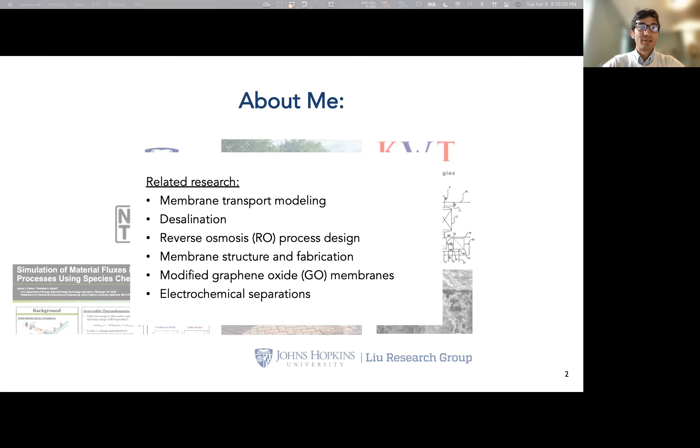From a point of shared knowledge, membranes are pretty much everywhere. Even if you haven't learned about membrane separation as a unit operation before, you're familiar with it. We've all in AP biology or high school biology learned about selectively permeable biological membranes, or done the dialysis membrane experiment, or maybe you make coffee every morning, or in pchem lab used vacuum filtration, or orgo lab. Basically, membranes are thin, selectively permeable barriers used for filtration.

You can think about membranes as mass transfer devices, in the same way that heat exchangers are heat transfer devices.

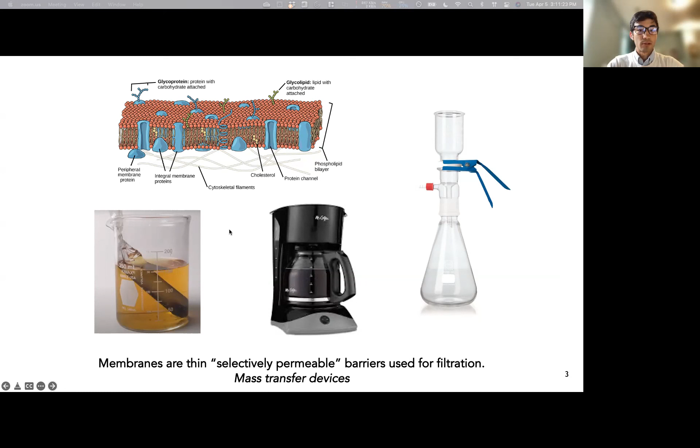Just a little bit of history. I wanted to show that membranes are a very new, young technology. The first really commercializable membranes came around for reverse osmosis desalination for drinking water in the 60s, so it's only half a century old.

Today there's huge market saturation, and there are many large capital projects for membrane desalination, which has been able to fund lots of research for other applications. I'll talk about those today.

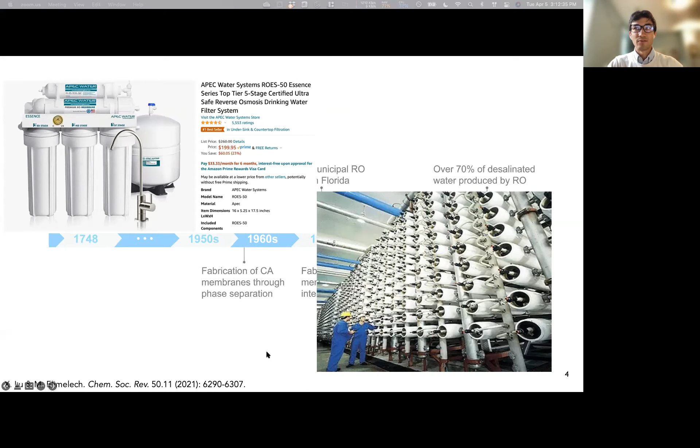Just to show the big scale, I took this off of Amazon, but you can get an RO unit for under your sink. I don't know if you'd want to, but you can. You can also have rows and rows of membrane modules — this is the Ashkelon plant in Israel, and it produces something like 100 million gallons a day of water, with about 15% of their drinking water coming from this single plant. So it really has the entire scale covered.

For some more context, this is the ultrafiltration setup we used in senior lab. So maybe you aren't going to work on membranes in the future, but you might work on them next year, so pay attention. And this is the NETL water lab setup that I was working with data from — a little more complicated maybe, but the same basic principles apply.

Finally, you can scale up — this is the Carlsbad plant in San Diego, California. It produces enough water for 400,000 people. The scale-up process, which I'll talk about a little more, is how we understand the process to build these large capital projects.

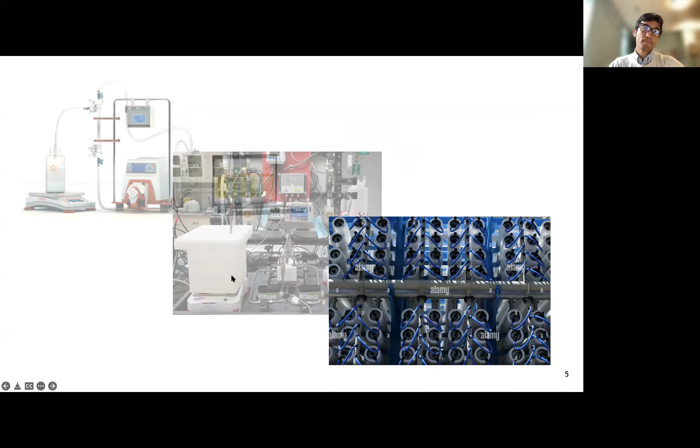So let's get on to today's topics. First, we're going to talk about the basic working principles. Then we'll get into the material science a little bit. Then I'm going to talk about my experience with reverse osmosis modeling, and try to explain that so you can use it or at least learn something from it. Finally, we're going to go into other industrial applications of membrane separation.

Continuing with general properties of membranes: it's a thin, semi-permeable barrier used to separate solute from solvent. We see ultrafiltration in the dairy industry for whey-milk separations, you can get air separation or desalination — there are lots of applications, and the different properties of the membrane confer different selectivities.

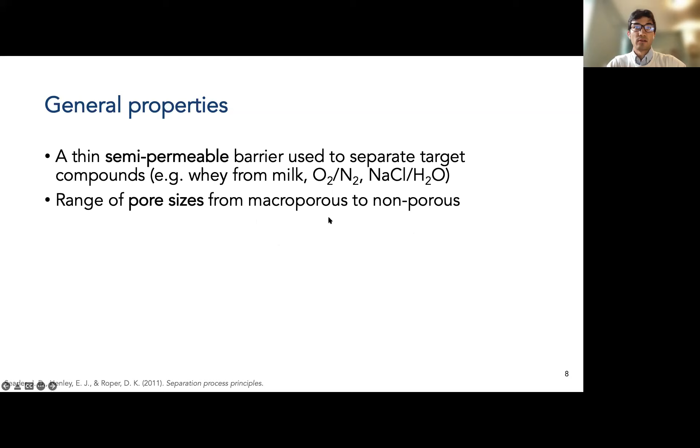Basically, based on the pore size, you can separate different compounds. You can have a completely non-porous membrane, which is highly selective but low flux, or you can have a very porous, macroporous membrane — I'll show you in a second.

Oftentimes we use polymeric membranes, but I'm going to also talk about different exotic membrane materials such as metals, nonmetals, and graphene oxide for my membranes. So, with the same figure from our textbook, the Seader textbook, I'll use that a lot.

Some of the mass transfer concepts I talked about before: in macroporous membranes, where the pore size is much larger than the molecules, there's no selectivity because there's just fast moving convection through the pores. There is a use for these macroporous membranes, which I'll talk about later, so don't forget about them. And then in microporous membranes, we can observe either selective or non-selective diffusion through the pores.

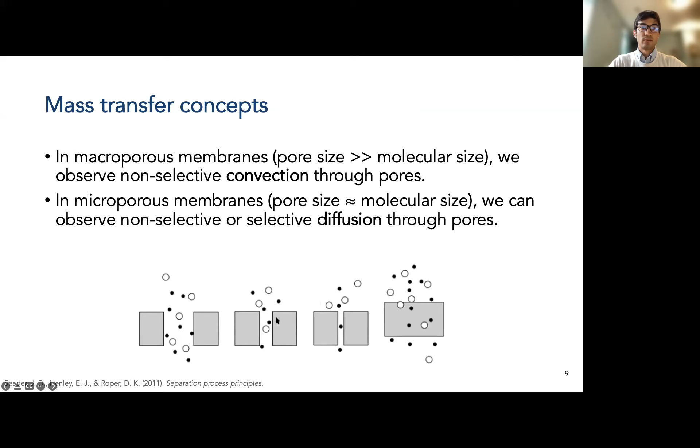And then finally, in dense membranes, we have this solution diffusion mechanism, which I will discuss in detail later on.

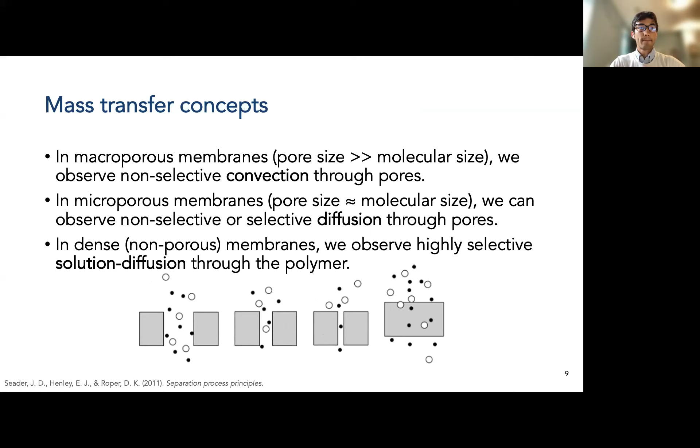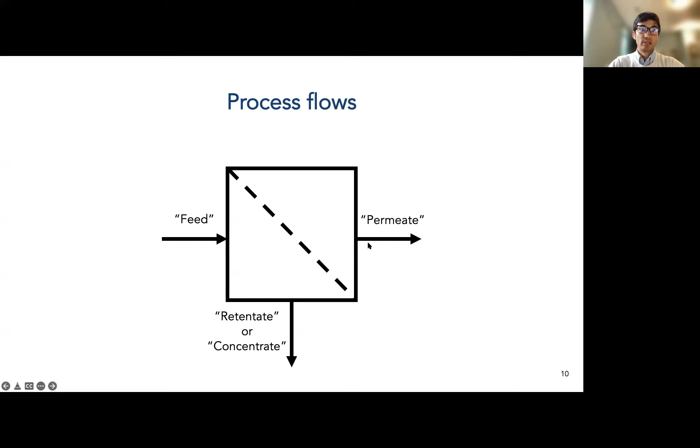For example, if we use seawater desalination, the feed will be seawater at 3.5 weight% sodium chloride in water. And if you recover 50% of the water, the retentate is 7 weight% sodium chloride. And then the permeate is pretty much pure.

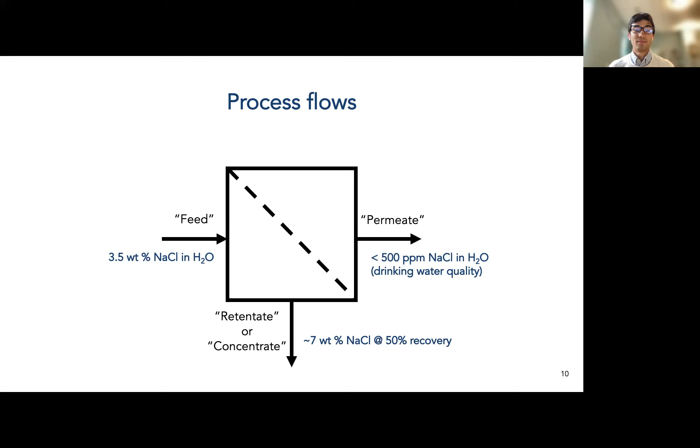Reverse osmosis saltwater desalination membranes have something like 99.99% rejection, so this is probably more like zero total dissolved solids. But let's just say drinking water quality is less than 500 ppm. Actually, it's so low, basically like zero, that they have to add minerals back for health reasons for RO water.

So some definitions just to remind you of. Flux is very important for our large area projects. If we want to scale up, let's say a flat sheet membrane in the lab in Maryland Hall to something that can produce drinking water for 500,000 people, you have to think a lot bigger than just simple rates. So flux, you're all familiar with that.

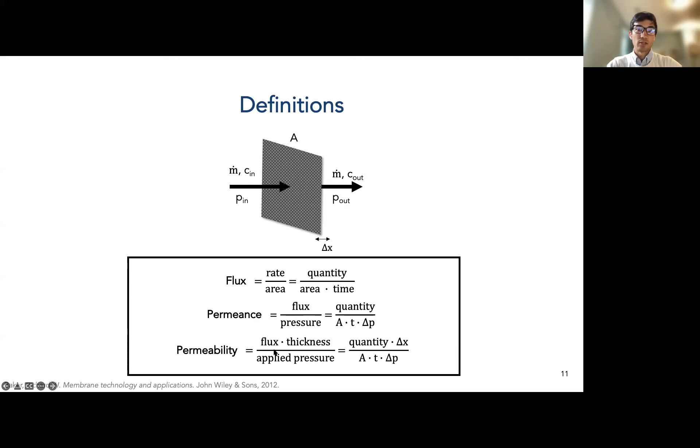When we normalize flux by pressure, which is essentially our product versus what we can sell versus our operating costs, we get permeance. So you're dividing flux by pressure. And then when you multiply that by thickness, you get permeability. Permeability is used because you can very easily predict, from integrating Fick's law, the effect of thickness on diffusion. And you shouldn't report five or six, ten different permeances. You can just report one permeability.

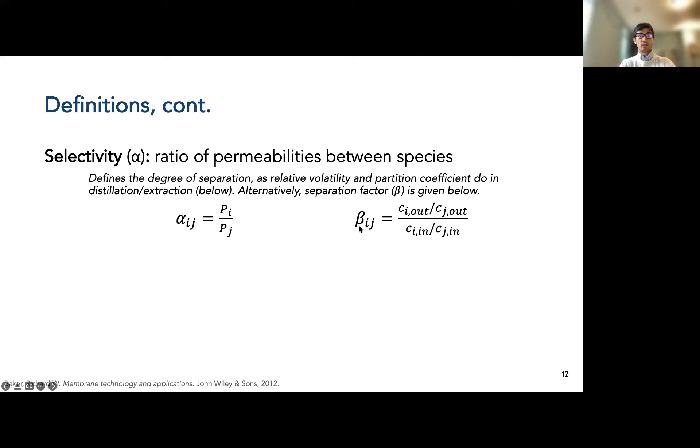And some more definitions: we have selectivity, which is essentially the degree of separation. So we use the ratio of permeabilities. It's similar to relative volatility in distillation or partition coefficient in extraction. And then additionally we can also use this separation factor, and also rejection R for selectivity, essentially. That's what's used in industry.

It's a very simple calculation for how much salt is going to be retained by the membrane, or how much protein is going to be retained by the membrane, how many cells. There are lots of applications for this. Rejection is very commonly used.

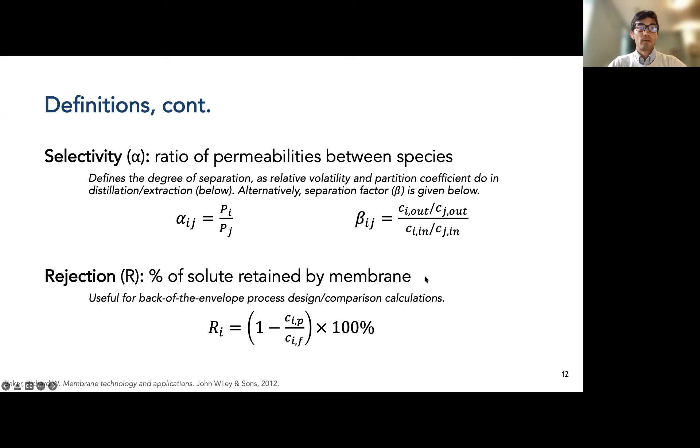Before I get deeper into modeling, I want to talk about black box models, where we don't really consider exactly what's happening at the membrane surface. We're looking at it from a big picture perspective. Let's say we have one input, one output, isothermal, 1D, lots of assumptions, very simplified system. And we have a standard flow rate, pressure, and concentration on each side.

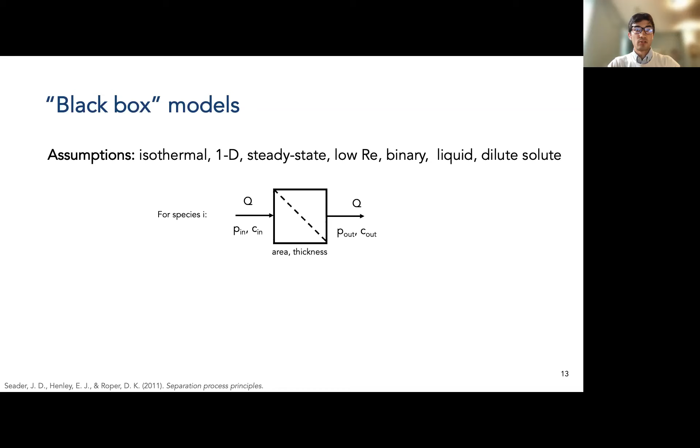And we are using a macroporous membrane, so large pores and convective flow. And from transport, you might remember the Hagen-Poiseuille law, and that is used to relate pressure drop to flow rate. So this is one end of the spectrum. If you have a macroporous membrane, you can relate pressure drop to flow rate very simply with something we derived when we were sophomores, right?

And you can lump up this constant. We can measure all of these into permeance, and J equals P times delta P. That'll come up later on.

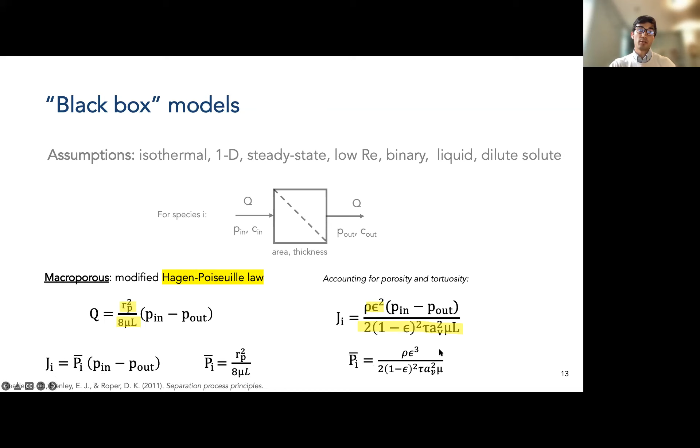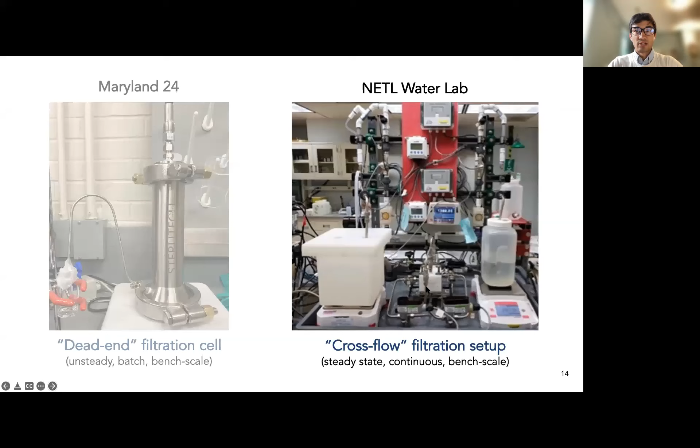Okay, so here is actually this cross-flow cell in the NETL water lab. It's made by Sterlitech. Another way of saying crossflow is tangential flow, and this runs in countercurrent, if you remember from heat exchangers. We have our flat sheet membrane in the middle, screwed together, and on the top we have a feed, input and output, and this circulates along the surface of the membrane.

We want it to be very well mixed so that we don't have boundary layers forming. And then on the bottom, we have something called a sweep on the permeate side. Basically the water is going to be pressed through here by hydraulic pressure through the membrane, and salt is going to be retained. So the feed output is going to have a higher concentration than the feed input.

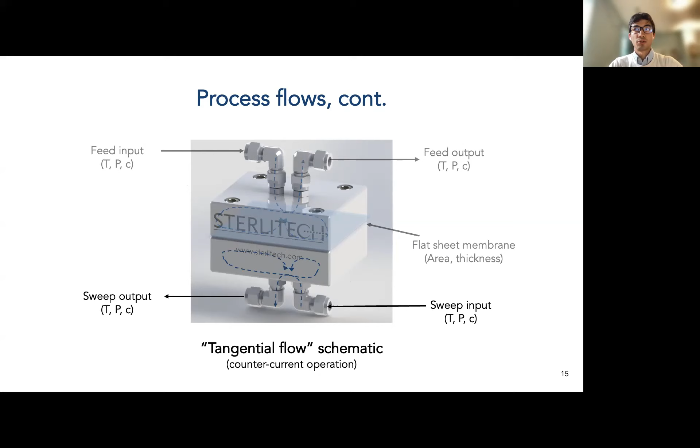This is the retentate. And then there's going to be more water on this side of the sweep than on this side. It all moves really fast, but you measure the temperature, pressure, and compositions at each of these inputs and outputs, and you can characterize the membranes.

So in actuality, it functions like a loop where we add feed to a recycle loop that is moving really fast to stir essentially on this side of the membrane, and our retentate comes out, we can measure that. Then the same thing happens on the permeate side. You can use a 1 input, 2 outputs of permeate retentate model, like I showed on the very first modeling slide. But in practice, with crossflow state-of-the-art lab setups, we will use 2 inputs and 2 outputs.

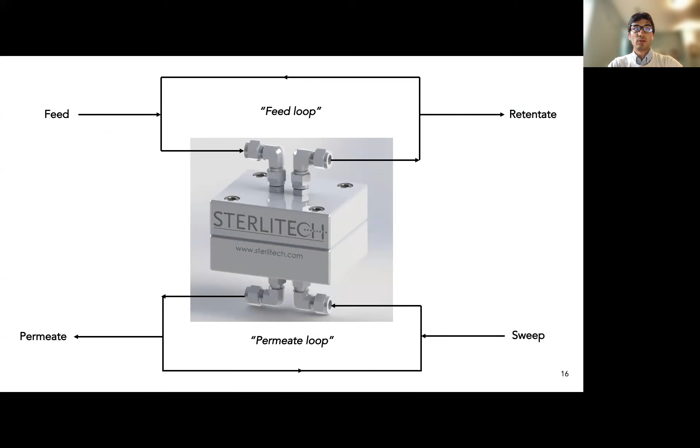And that's just a picture of what it actually looks like, the bolts and everything.

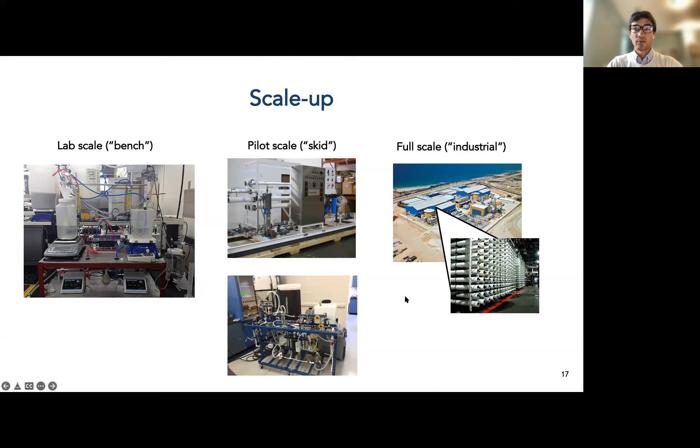And then the Ashkelon plant quotes, I think, 0.2 cents per gallon as their overall cost for water. And then the Carlsbad plant in San Diego, which I talked about earlier, which is the largest in the US, quotes 0.5 cents per gallon.

And then just to give you a little bit of a break, I know that was a lot. These are just some of the giants in the field of membrane separations. And if you are interested in reading more and learning a lot, these are who I would recommend you look up on Google Scholar or whatnot.

UConn has a big lab, as do Georgia Tech, Stanford, Yale, and USC, and Baker wrote the fundamental text on membranes. And then obviously we have our favorite professor from chemical engineering at Hopkins, Dr. Tsapatsis. He works with zeolites, adsorption, and gas separation. If you're interested in membrane separations and haven't taken any of his classes, I definitely recommend it.

In industry or other big names in membranes, we have NAWI, an industrial, academic, and government partnership group, and MTR, which is kind of an industry, academia, research and development group. But Millipore, Dow, and DuPont are really big membrane manufacturers, and they've done a lot of development that's allowed us to have large scale desalination or ultrafiltration these days.

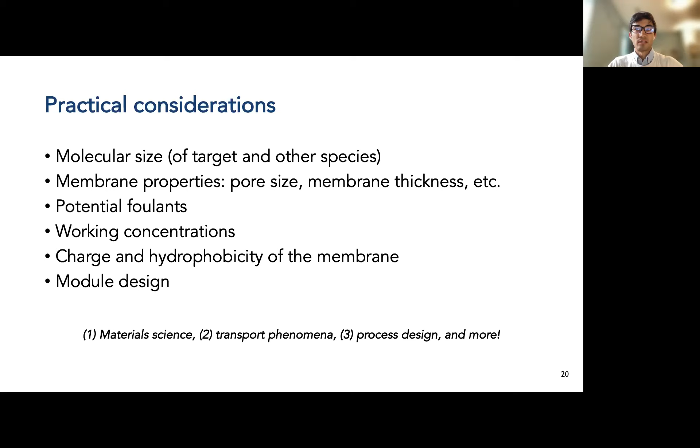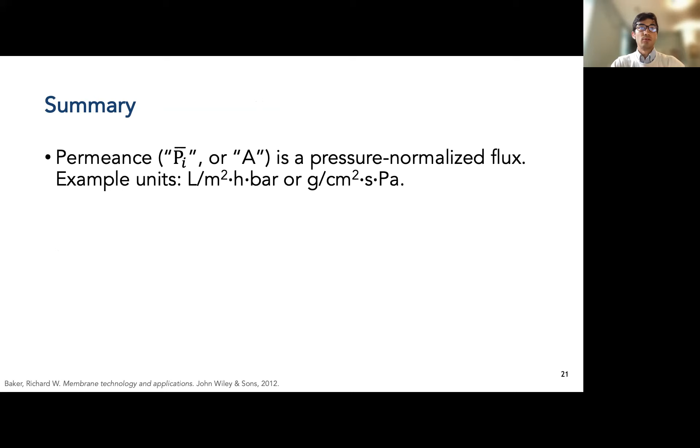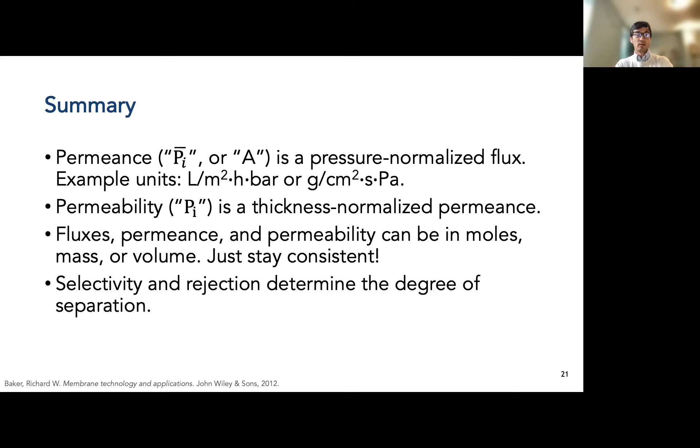Just to summarize what we've done so far with the fundamentals: we have permeance, which is P bar - they call it that in the Seader book - or A, which is more commonly known as pressure normalized flux. We use LMH per bar, or we can also use CGS units here. Permeability is just the thickness normalized permeance, and that's always a capital P. You can use permeance, permeability, and fluxes with mass, volume, or moles - just be consistent and understand the assumptions involved. Finally, selectivity and rejection determine the effectiveness of our process.

Okay, so now I'm going to get into the materials, which I promised you.

For the basic structure, we have two different types: symmetrical membranes, which were the original but are less effective, and asymmetric membranes. What birthed the membrane separation industry was the invention of asymmetric membranes in the 50s, 60s, and 70s. But first, symmetrical membranes have the exact same structure throughout the entire thickness - they can have that same microporous or dense structure. But if you think about it, maybe this dense structure is very selective, but it's so thick it would take forever for something to diffuse through. So let's say we combine the dense membrane with the microporous membrane, we might get something better.

What we want in a membrane is mechanical stiffness so it can withstand high pressure, as well as selectivity to add value. If we only need a very thin layer of dense membrane to get enough selectivity, anything else is a waste - we shouldn't be using it just as mechanical support. What asymmetric membranes do is exactly that: use a very, very thin dense coating on top of a porous support. The porous support adds enough mechanical support, and the dense layer doesn't add too much mass transfer limitation while adding a ton of selectivity.

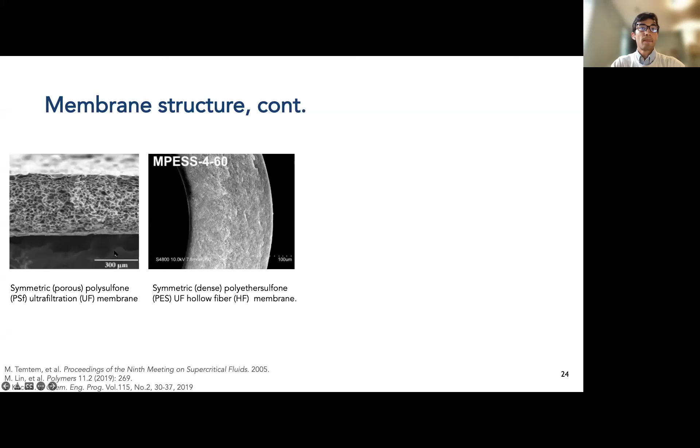This Loeb-Sourirajan membrane was one of the first cellulose acetate materials, one of the first anisotropic membranes. Just some pictures of what this actually looks like: here is a symmetric polysulfone ultrafiltration membrane - you can see it has the exact same pore structure throughout, very wide pores. These are SEM images. Here's a symmetric PES ultrafiltration membrane, this one in hollow fiber form, which I'll talk about later - instead of being a flat sheet, it's rolled up in a circle, a tube essentially. I'll talk about it later.

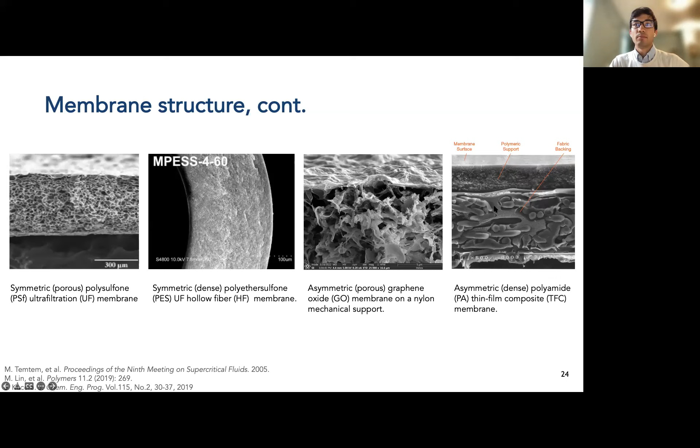Just to summarize the materials here, we have polymeric membranes, which can take any form of these polymers. Cellulose acetate was the beginning, polyamide is the current standard, and these other materials can have their purposes too, but polyamide and cellulose acetate are the main ones to remember.

There's also inorganic membranes, which are looking to compete with polymeric membranes because they are more resistant to fouling, thinner, or whatnot. We can use metals for gas separation—that's hot in research these days, I'd say research in academia, not industry, and very expensive. Ceramics as well: alumina, titanium dioxide, silica. We have metal organic frameworks and covalent organic frameworks—all these materials are extremely expensive. Zeolites have their purpose, but it's hard to compete commercially with polymeric membranes.

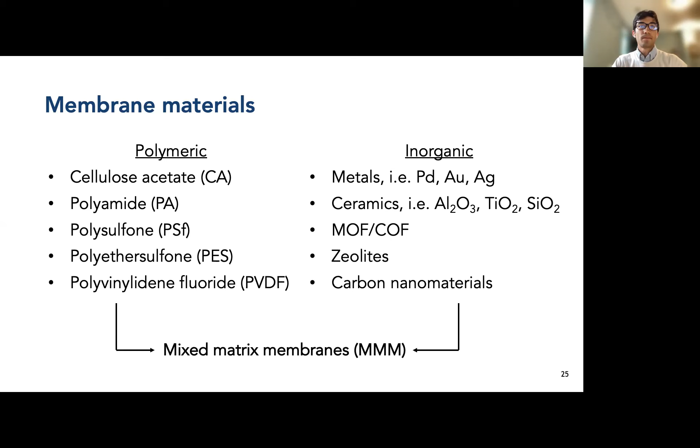They're very good at what they do. And then finally carbon nanomaterials like graphene oxide, which is what I use. So inorganic materials are very expensive and haven't really been able to compete with polymers, but have some unique properties. A new area of research is combining them with polymers in mixed matrix membranes—while making the polymer, you add flakes of inorganic material to combine the best properties of both.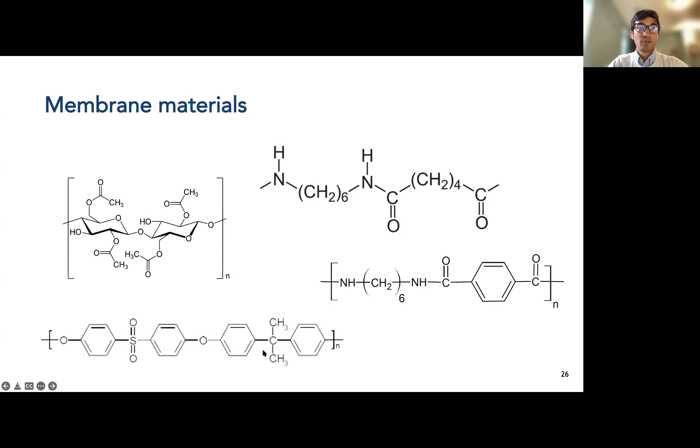And here are some structures of those polymers I mentioned. You can take your pick, try to beat me in the chat, but I think we have cellulose acetate here. This is polyamide, aliphatic polyamide, aromatic polyamide, and polysulfone. I'm not going to talk much about polymer science—there's entire classes about that.

For fabrication, we can fabricate symmetric membranes pretty easily in the lab with a casting knife on top of runners. You pour out a solvent and polymer mixture or solution, cast it into a uniform film, and just let it dry—it's like making paper.

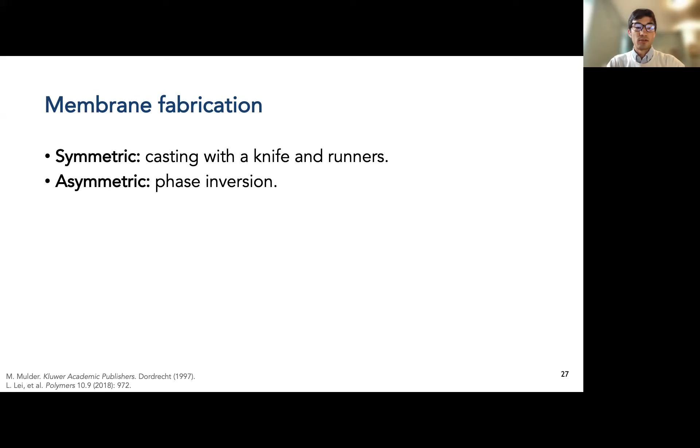Then we can also make asymmetric membranes by carefully controlling the precipitation phase inversion, essentially controlling the precipitation rates at different interfaces. You can have a thick porous support with a very thin, dense selective layer. Composite membranes are kind of similar—you can make them a couple different ways: coating on top of a porous support, filtration on a porous support, or interfacial polymerization, kind of similar to phase inversion.

This is a hollow fiber casting process where instead of casting in thin sheets, they use a spinneret to make an annular structure—it looks like a really long straw. They use the same ideas of precipitation, carefully controlling every parameter in the process, like the time in the air, the concentration in the spinneret, temperatures, humidities, everything to get the properties they want.

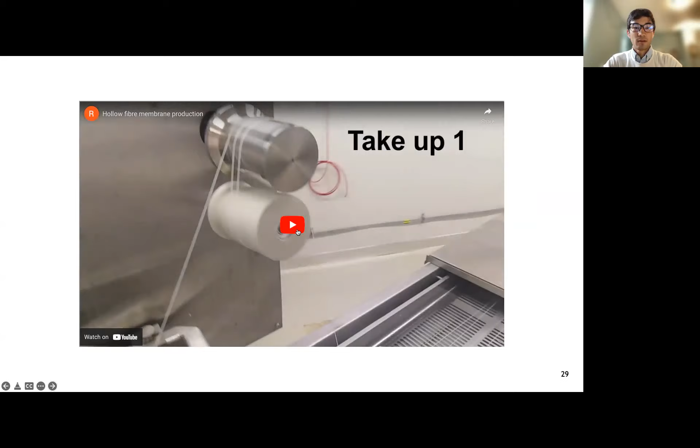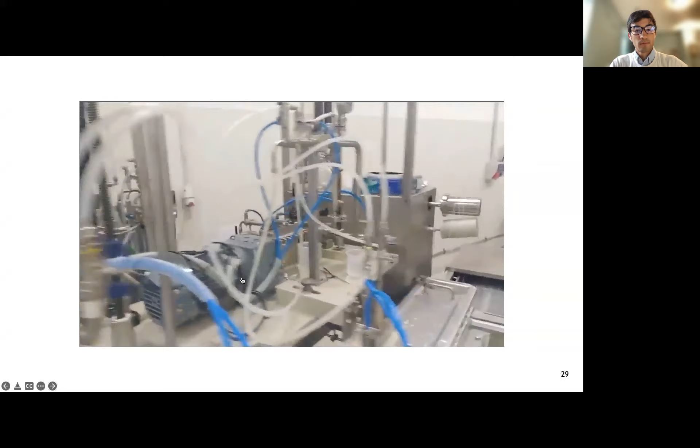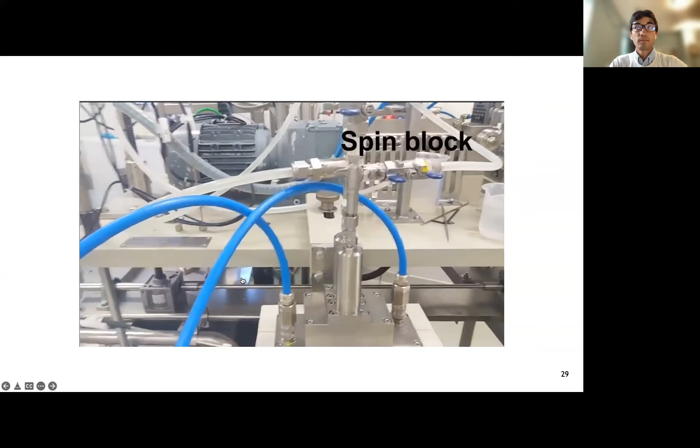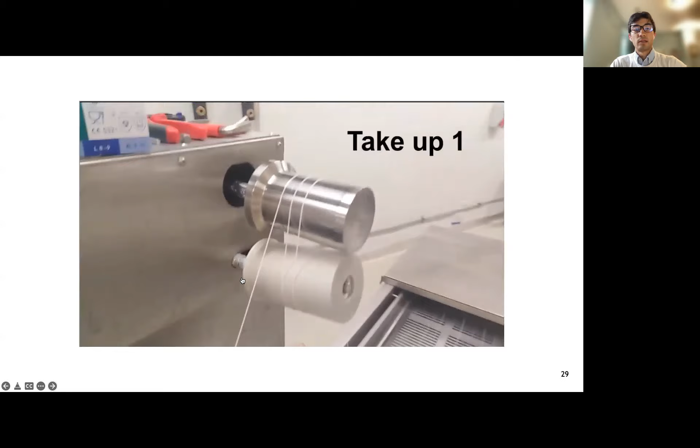Let's watch the hollow fiber video. We were just looking at the process—here's mixing the solution, and they're going to pump it up to the spinneret I was talking about. That would be the spinneret, and they have two running. It's precipitating a little bit in the air and then in the water, and then they start rolling it. They make miles and miles of this, and I'll show you how they arrange it in industrial processes.

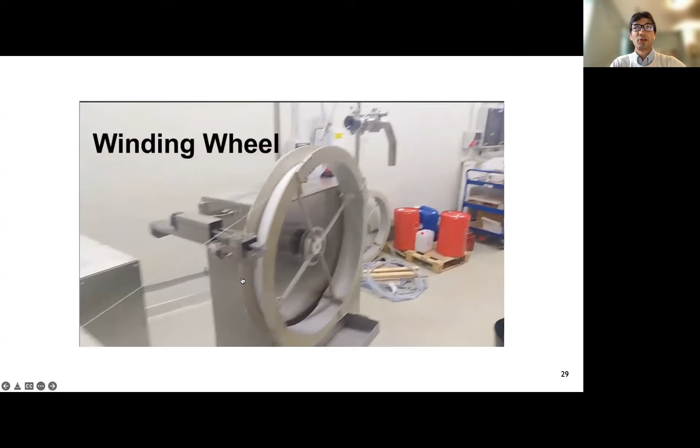Not sure if we have one of these at Hopkins, but if we do, it would be in Dr. Sapatz's lab—probably not this big. But yeah, that's hollow fiber spinning.

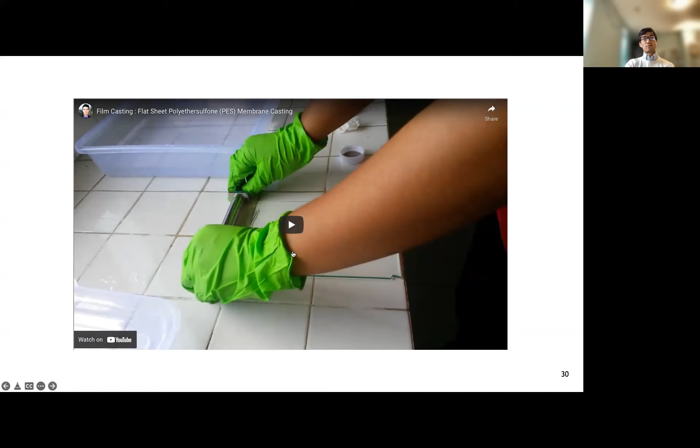I have another video. This is film casting of an asymmetric PES membrane. Just show you, and then we'll get started on the rest of the slides.

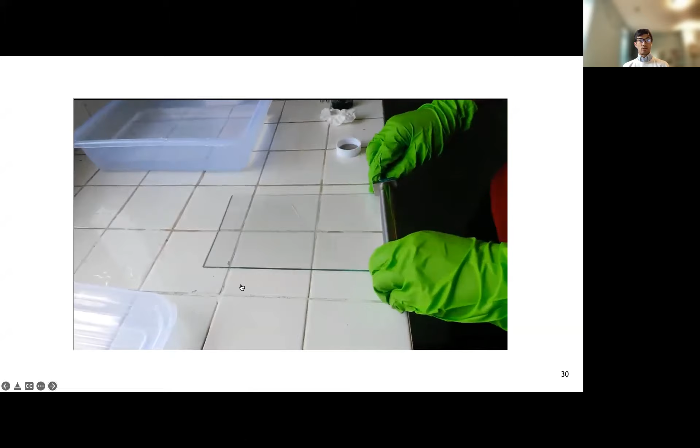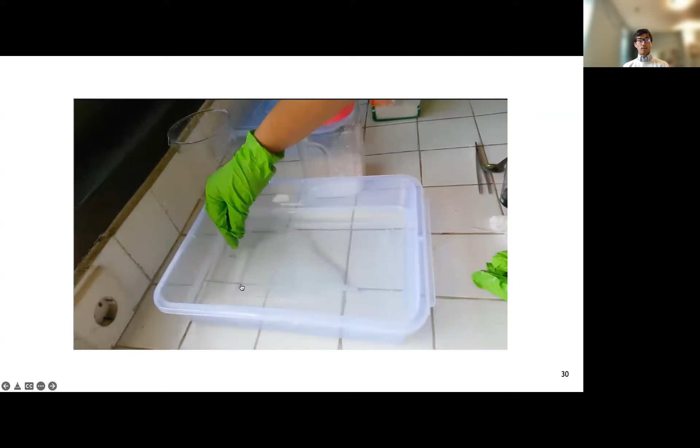So that's a polymer solution. They're rolling it out to a consistent thickness—it's still a solution. And then they're dipping it into a coagulation bath, or a non-solvent, which is water. Not so complicated.

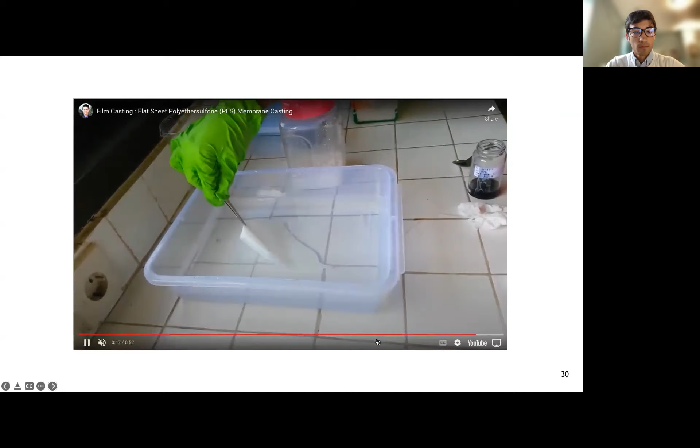All right, hopefully I had some time to digest in those.

Other question: the benefit of making annular structure. I'll answer this later, but imagine you have a flat sheet membrane and want to maximize surface area within limited space. If you roll up this surface area into tiny, long, thin straws and pack them tightly together, you can get a huge amount of surface area for the same volume. That might save costs and increase productivity. There are some concerns with hollow fibers, but they're widely used for that reason.

I could talk about the mechanism a little bit. In a flat membrane, you're pushing solvent through, right? The same thing happens with the annular structure. You have your feed going around the structure and pressure going in all around. You can think about heat exchangers a bit: you press the permeate through, it comes out through the tube, they're all connected at the end, and the retentate stays along the outside.

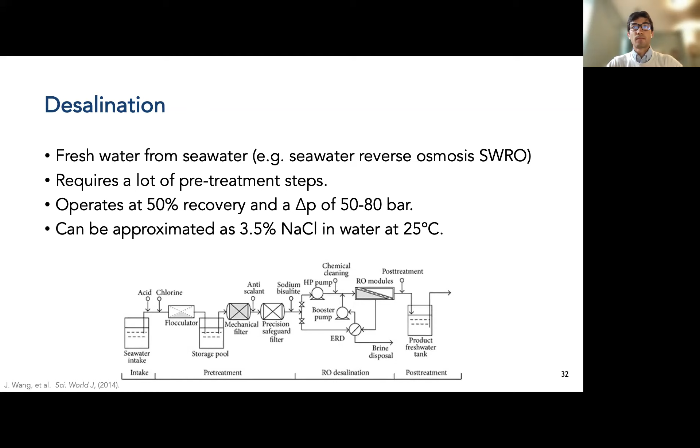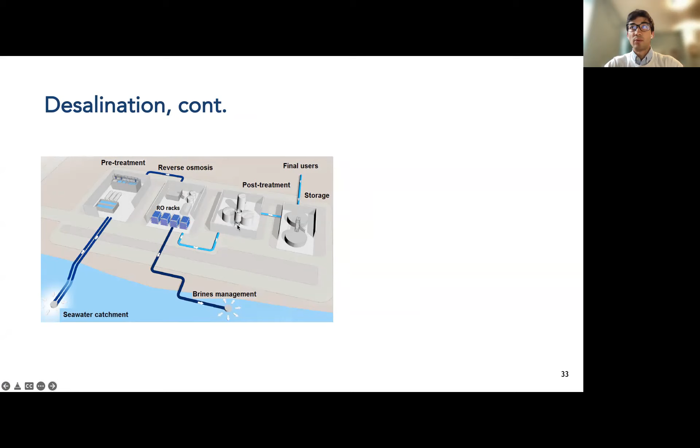To show you what the process might look like: you draw in water from the ocean, you pre-treat it to remove contaminants and fouling, like biological things that might foul the membranes, and things the membranes might not be able to remove—boron is one of them. You pump that through the reverse osmosis system and dispose of the brine. Then the fresh water gets post-treatment, which is probably adding the minerals we need to survive.

The solution diffusion model is used to model dense membranes, such as the ones used in reverse osmosis. This functions using chemical potential as a universal driving force to combine pressure and concentration together. In the membrane, you have the competing forces of osmotic pressure limiting the flux and pressure pushing against it, right? You can also add electrical potential and temperature gradient into chemical potential, but for this purpose we just use concentration and pressure.

You're familiar with Fick's law and Fourier's law and whatnot, but you can also write a phenomenological flux equation for chemical potential as the universal driving force. This is what we use for water transport, but you can actually assume just Fick's law for salt transport because the concentration term is so much larger than the pressure term.

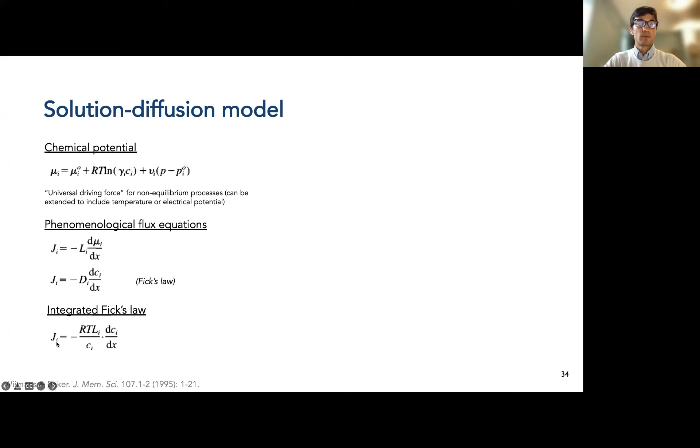So when we integrate Fick's law for the salt flux, so Ji would be J salt—you want to account for both the salt and water transport in desalination, right? This is what results. Sorry, this is not integrated yet, my bad, typo—we will integrate it. This is Fick's law; when you don't show the diffusion coefficient, I'll fix that.

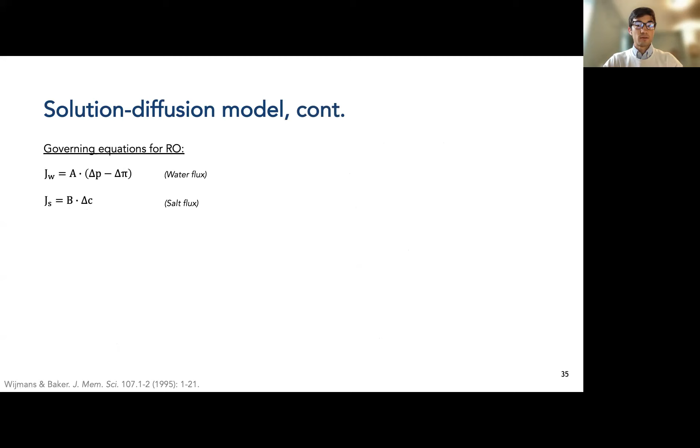These are pretty effective at modeling low salinity reverse osmosis processes. The pressure is applied to overcome osmotic pressure, like I said earlier. These are from Baker's text, as well as a paper from a while back, comparing the pore flow model, which I showed earlier, to solution diffusion. The pore flow model is actually just a competing model for desalination, but same concepts.

So we characterize our system using A and B as constants, but how might we measure them? This was the subject of a lot of my work with NETL. I was analyzing some data they collected in LabVIEW on their system and finding A and B. A, like we said before, is the pure water permeability.

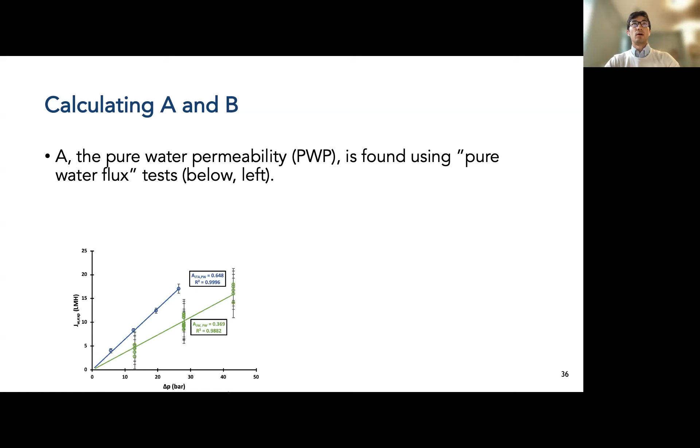A is found from flux tests. Basically, if you run pure water through that cross flow setup, you can vary the pressure and see the difference in the flux. You can directly relate that - the delta pi cancels out because there's no salt, so it's A delta P to JW. That gives you this linear correlation, and the slope is A.

For B, it's a little bit more complicated, but since we know A, we can do more flux tests with varying concentrations, and regress that data with the A we already know to get B. I was trying to fit this - it isn't exactly linear for B delta C versus JS, but it's actually comparing experimental fluxes they measured with conductivity meters to what we predict from the equation. But it's the same idea. We used chi-squared minimization as our error, not least squares - that's similar.

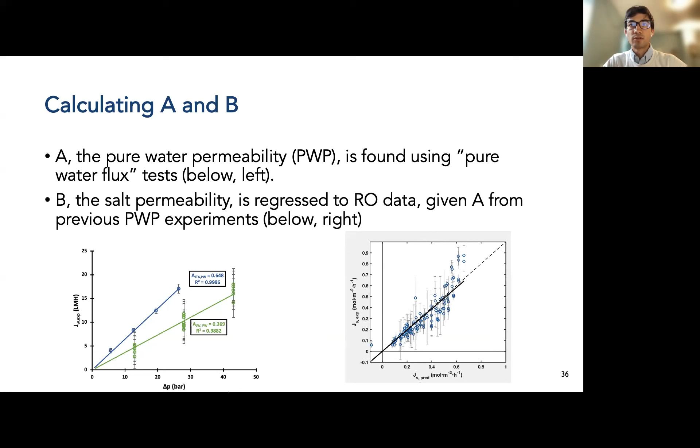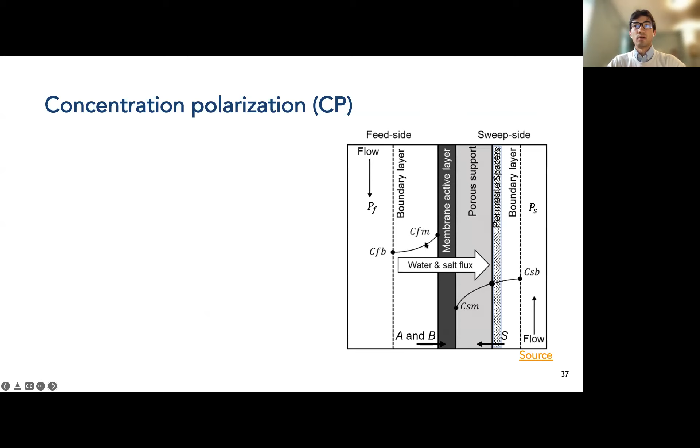Now I want to talk about another important concept for reverse osmosis called concentration polarization. This is a schematic of what a membrane process looks like in cross section. This is our membrane here, with multiple layers like we discussed earlier - the porous support, the thin active layer. The water is getting pushed across, and then also some salt is going to go with it. This is a bit extra.

You can use this to model any osmotic process, but if we simplify it, we can just look at the feed side, because in reverse osmosis the sweep side is essentially zero TDS, zero concentration. Basically, as you push water across the membrane and retain salt, no matter what you do, salt is going to build up at the membrane surface. That causes the boundary layer, which we call concentration polarization. This will decrease our driving force because it increases the delta pi, the osmotic pressure difference across the membrane, which, since it's delta P minus delta pi, will inhibit our flux.

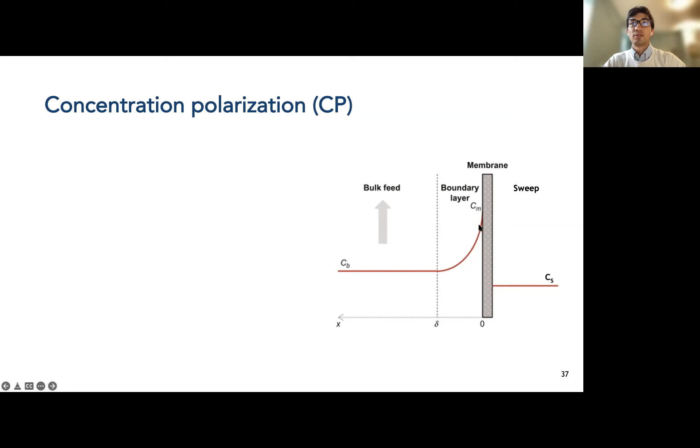So this concentration polarization expression is derived from a convection diffusion model of the system. Basically, you're pushing convection this way, diffusing back, but convection is much larger than that diffusion, and it forms this boundary layer. This does a good job of approximating this. I'll talk about the parameters in just a second.

Okay, so we have our same system, our three equations now, and we have three unknowns: JW, JS, and CFM. Now, if we assume CSM and pi SM to be 0, we only need three equations. But if this is not 0, then we can get a fourth correlation for the sweep side.

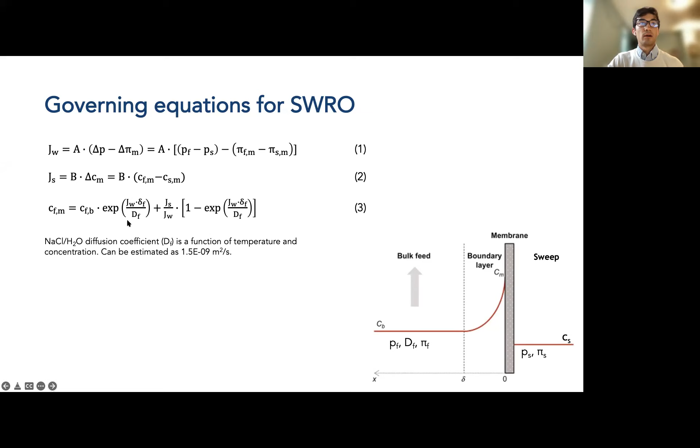The diffusion coefficient is known, right? We can measure that as a function of temperature and concentration, or estimate it to be this. Then del F is the thickness of the boundary layer, if you remember that from transport. You can correlate that to the flow conditions - there's correlations in textbooks, or you can fit it to experimental data, or you can estimate it. It's not too sensitive. And equation 3, like I said, is boundary layer theory.

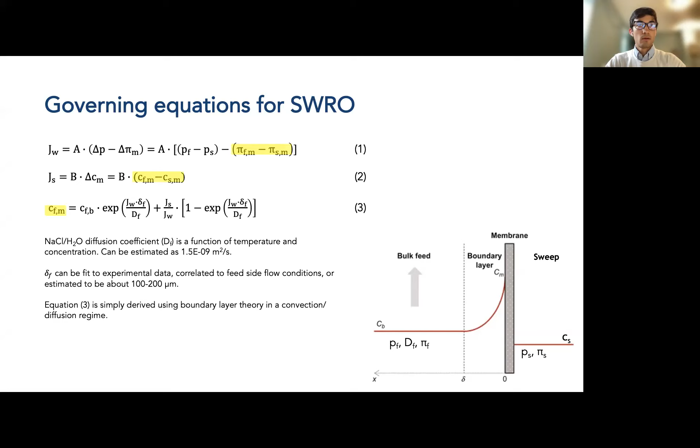And we'll go through that. Okay.

So that was a discussion of how you might model an osmotic process mathematically. The models I used were a little bit more complicated than that, but you could definitely get by with this. There are lots of different ways to do it. But if you're more interested, I'd be happy to talk to you and share more.

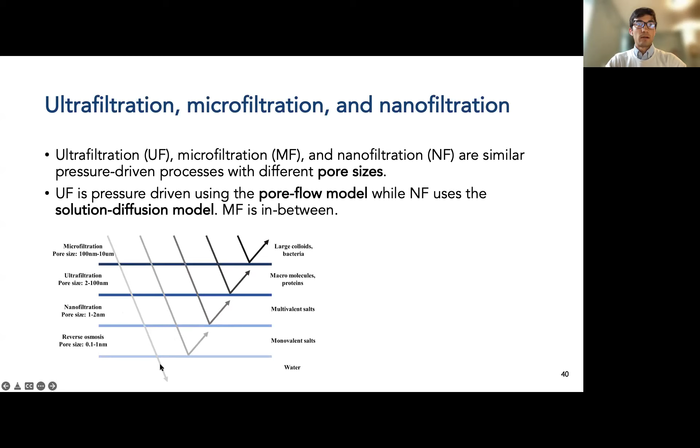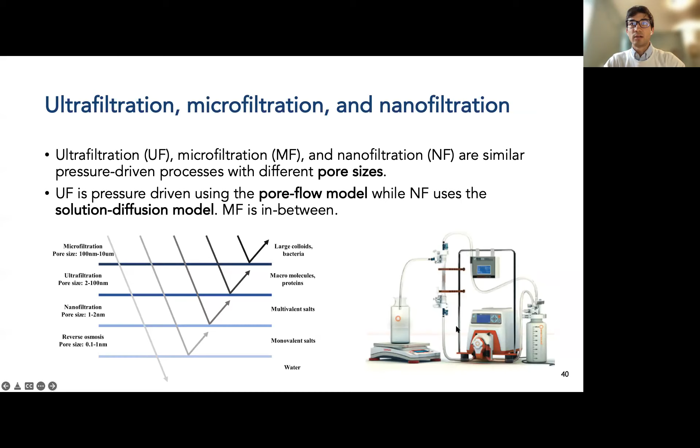We were separating dextran from a dye, I believe, so a large polymer from a dye molecule. And we used an ultrafiltration, I think hollow fiber membrane here in a tangential flow setup. It's a pretty cool project. I hope you guys got to do it.

And for some other osmotically driven processes than reverse osmosis, here is just a schematic of the interplay between osmotic pressure, solvent concentration, and the membrane. This is actually pretty bad because I don't think there should be red on both sides. Anyway, I think you've seen these manometer pictures before.

There's forward osmosis, which is exactly what it sounds like. There's lots of words here, but forward osmosis just follows the driving force of the water going to the saltier side to dilute it. This is commonly used in industry for separations pre-treatment.

PRO is an energy generation process. Basically, if you use forward osmosis, but you push against the water that wants to go through it - let's say you have salt on this side, water on this side - water wants to go through, but if you push against it, or like spinning a turbine, you can generate power.

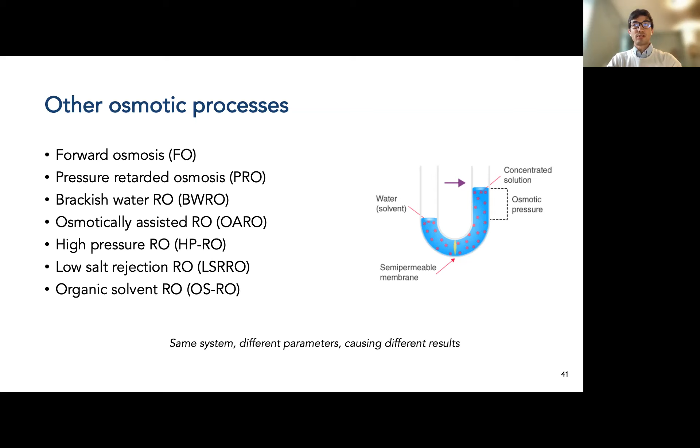BWRO is basically just high flux RO for lower salinity waters. That's used to produce drinking water out of aquifers and whatnot. Osmotically assisted RO is kind of a combination of forward osmosis and reverse osmosis. It's the big topic of the research at NETL that I was working with. High pressure RO is exactly what it sounds like, same with low salt rejection RO. These are all just kind of new ideas in the field - essentially the same system, but with different parameters, and then we get different results.

So another different application of membrane separation is pervaporation, which stands for perm-selective evaporation. It's different from reverse osmosis or gas permeation because it has two different phases - there's a liquid on the feed side and a vapor on the permeate side. You use a vacuum or heating, as well as a unique membrane, to get that kind of separation. Its applications are dehydration of organics and separation of close boiling mixtures.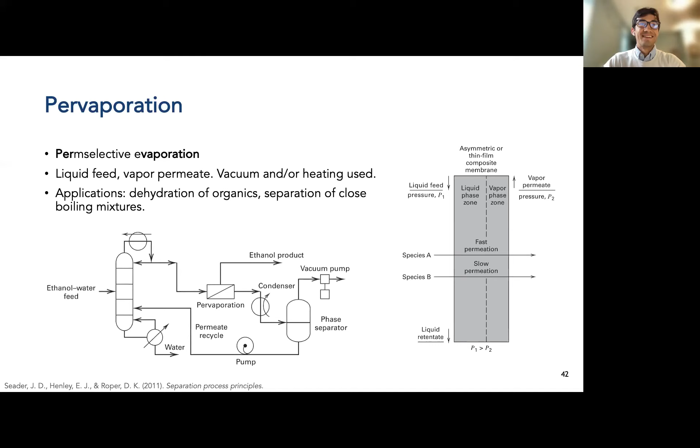And here's a process design using pervaporation to separate an ethanol water azeotrope, from the Seader text. This isn't really used in industry, but you guys know how hard it is to separate ethanol and water above 80 weight percent, or 80 mole percent, yeah. But they use desiccants in industry.

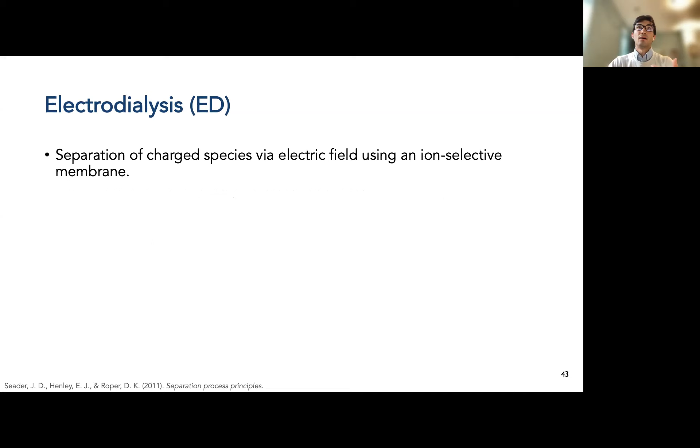And okay, so here's another membrane separation process that I'm sure Dr. Liu will talk about. I don't want to talk about it too much, but it's called electrodialysis, and I'll just introduce it for her. Basically, electrodialysis uses the driving force of electric potential to separate charged species out of a brine using the electric field.

And a key unit of electrodialysis is an ion selective membrane, CEM or AEM. And they arrange these in series, apply a potential to both sides. I'll show you a picture, but basically you feed in the water and the positive and negative charges will migrate based on the electric field, and you produce fresh water and a brine in alternating forms. It looks a lot like a fuel cell, and obviously cation and anion exchange membranes are useful in fuel cells as well.

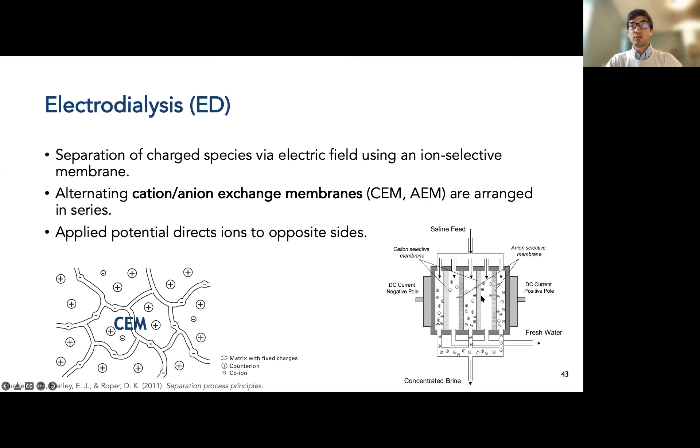So here's a little picture of what that looks like. You apply an electric field across this whole system, and you can push the ions out and retain them with the ion exchange membrane - you can see the negative ions can't get through the cation exchange membrane.

This is just 3 channels, but they actually have lots of channels arranged in series. So there would be negative ions going through here, and then more going down there.

Another application for membrane separation is called gas permeation. I remember spending like a week on this in undergrad separations, but there's some good resources out there. This is the oldest membrane separation process. I think they used it in the Manhattan Project to separate uranium hexafluoride, different isotopes of uranium.

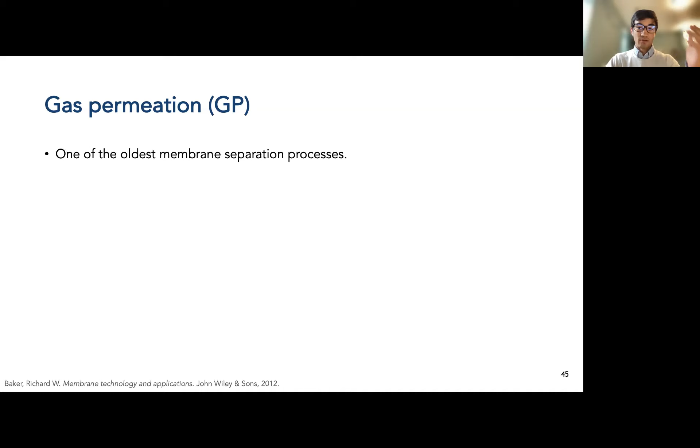It's a pressure-driven separation, vapor phase with a membrane. And just like liquid separations, there's lots of different pore sizes, can be solution diffusion to convective, and they're separated by different properties. The applications of gas permeation are very wide, from air purification, oxygen, nitrogen, to fertilizer processes, hydrogen, nitrogen separation, and hydrocarbons. It's a growing field, and there's certainly a lot of investment in gas separation. We'll see how that comes.

This is from Baker's text, which I mentioned earlier, but I think there's figures just like this in the Seader textbook too. It looks just like that one input, two output model I showed very early on. We have feed, retentate, permeate. We use partial pressures instead of concentrations here.

Here are some of the important terms. We talked about selectivity, and pressure ratio is straightforward, but cut is essentially the productivity of a stage. We'll talk about trade-offs later on, but this is one of them. If you have a low cut, you're not really producing anything, but you aren't consuming much energy. If you have a really high cut, you're producing a lot, but you're consuming more energy because the concentration gradients change. The cut is theta.

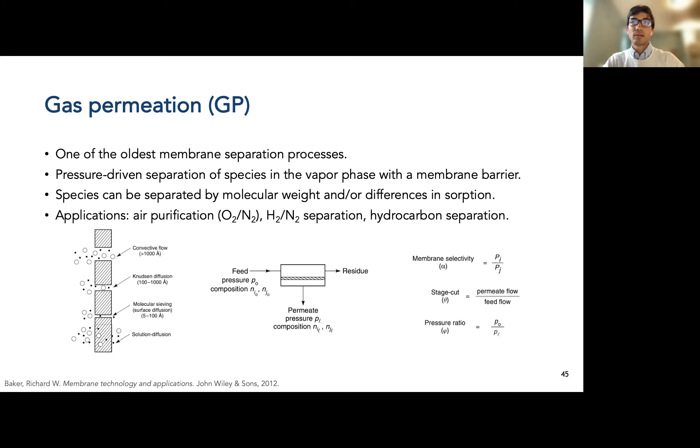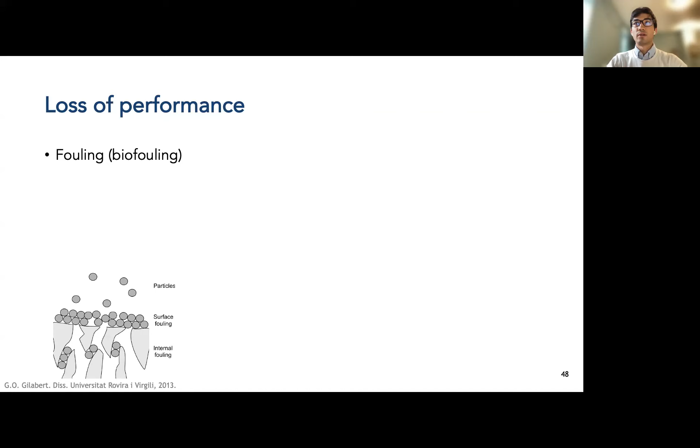Concentration polarization we discussed earlier. If you have the boundary layer, you increase the concentration at the surface and you have a huge delta pi, then it's going to eat away at your operating costs because you need more applied pressure on the feed side in order to push the water through. Because of osmotic pressure, water wants to go this way, water wants to go this way - that's why it's called reverse osmosis.

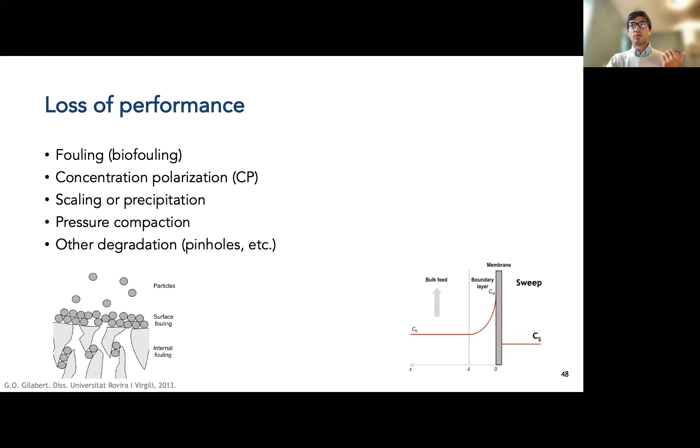There's also scaling or precipitation, which looks just like this. If you have too much concentration at the surface, you can actually form a precipitate. And compaction is just what it sounds like, pushing the membrane together with pressure, which will decrease the flux. Other degradation from pinholes or oxidation with chlorine can cause loss of performance, forming holes or something like that. You can lose performance in selectivity as well as in flux.

You could spend a whole class on this, but I'm trying to distill it all into one day, so hopefully you're learning a lot. Packing density is area per volume, and plate and frame is less optimal in that regard, but we need to use that type of setup for electrodialysis. Spiral wound is a little bit higher, and hollow fiber gives us the highest packing density.

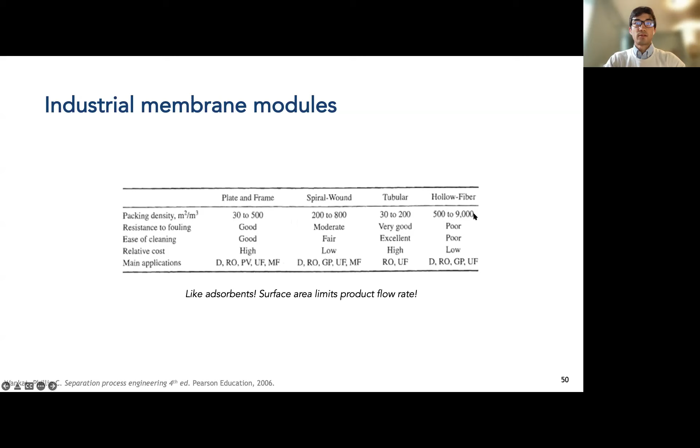And yeah, just like we learned with adsorbents, finally this is what they look like at the industrial scale. Electrodialysis is actually used industrially to separate low salinity brackish water, or for the semiconductor industry to make ultra pure deionized water.

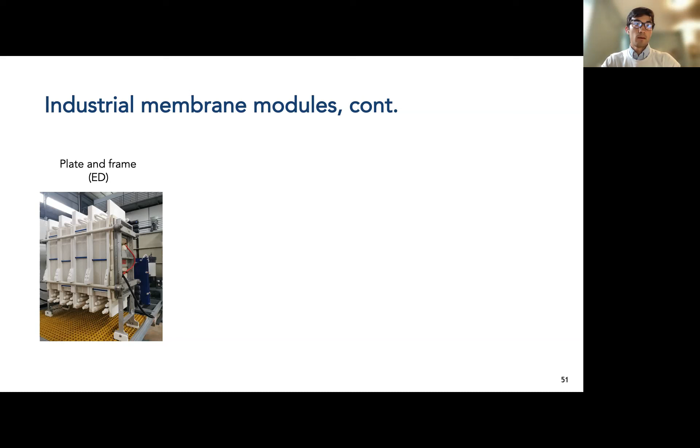I think we're right on track for time, and that's it for today. There's a lot to pack into one session, but I remember spending multiple weeks on it - I've spent years on it. So if you're interested, I can definitely point you in the right direction. If you want to learn more, feel free to email me. The Seader text is really good. Are any of you doing membrane separation for your final projects? I can definitely help you. But now I'll open up the floor for any questions.

Oh, awesome. Just membranes in general, or are you looking for a specific process? Oh neat, there's a lot of information out there. Well, let me know if you want some resources, I can share them with you.

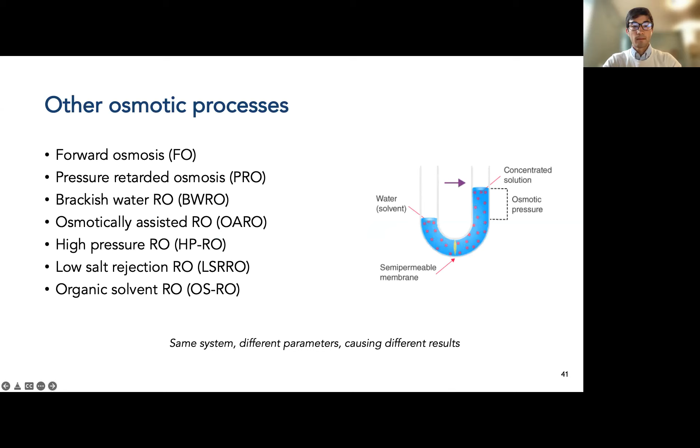These are probably the most related processes to RO. There's lots of different types. All right, well, if there aren't any questions, I guess we can stop. I can stop sharing.

Is there anything else you'd like to talk about, Dr. Josephson? Well, let's thank James for sharing his presentation with us, with lots and lots of knowledge and information. Yeah, last year in my class, we spent, I think, about 3 weeks on membranes as well. There's just so much to talk about. So thanks for trying to condense some of this information here.